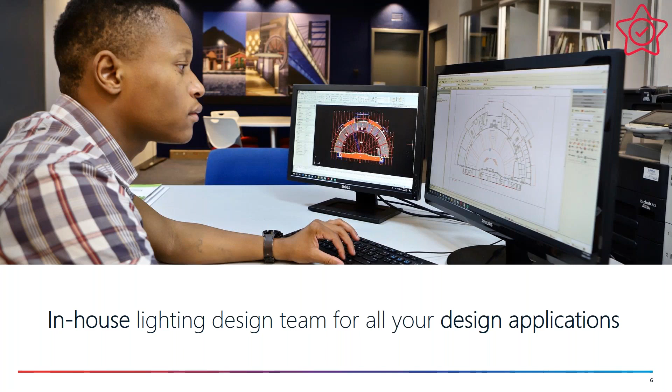Our in-house lighting design team has many years of collective design experience available to meet all your specific design needs. Our design team is proficient as well as flexible in providing solutions for virtually all aspects of lighting applications. Further aspects such as ROI calculations, that's return on investment, 3D modelings, etc., are all easily submitted by our team of lighting specialists.

As a design and manufacturing company, we offer lighting solutions for virtually all projects and product segments. Today's focus is on our BEKA glass reinforced polyester, or commonly known as a GRP pole, which are suitable for use in all the segments, be it ambiance, road and street lighting, various flood lighting applications, all the industrial and industry applications, and the various commercial segments.

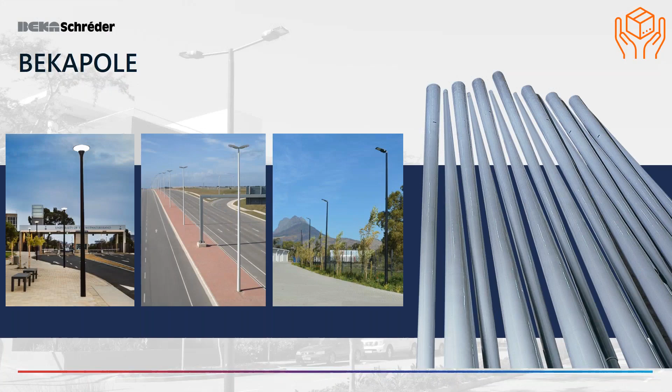So now let's consider the BEKA pole. As I mentioned briefly, our poles are perfectly suited for use in roads, in motorways, in urban and residential streets, interchanges, predominantly on the exit and entrance ramps, or in other words the on and off ramps, various urban areas such as squares or pedestrian zones, naturally bike and pedestrian paths, and various area lighting.

That could be such as various security requirements or large parking areas, harbors, be it the inner harbor roadways, access roads, or the multiple security requirements within the harbor, sports complexes, parking lots, access ways, perimeter lighting, security lighting, etc., and generally security lighting in various complexes and venues.

It could be perimeter lighting of prisons, police, army bases, air force bases, etc. as an example. Shopping centers, we could be utilizing our poles in parking areas, access roads, surrounding areas, security, plus many other applications, even railway zones as an example.

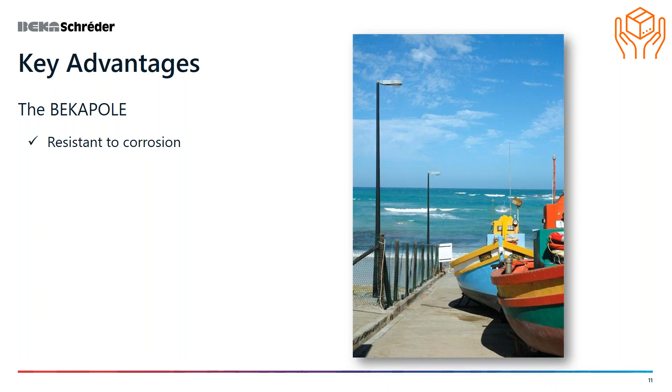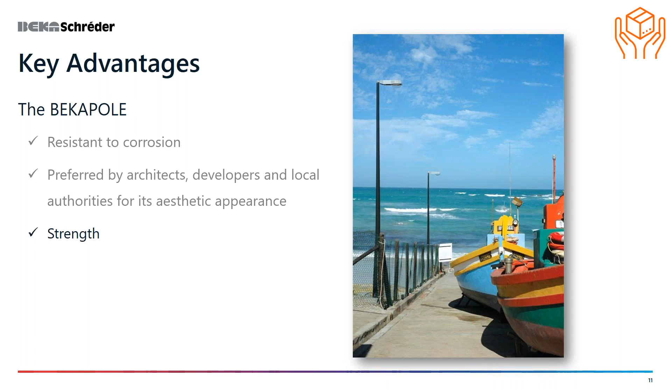Some key advantages of the BEKA fiberglass pole: it's used not only for resistance to corrosion, which is certainly a very high key advantage for the utilization of our GRP pole, but it's also preferred by architects, developers, local authorities for its very real aesthetic appearance with the continuously tapered pole, its intrinsic strength properties, the ease of installation, and the inherent safety for road users, which I'll discuss a little bit just now.

Another significant advantage is that our BEKA poles are completely maintenance-free. So there's no corrosion or decay, which ensures that the surface coat of the pole will not require maintenance, nor is there any internal deterioration.

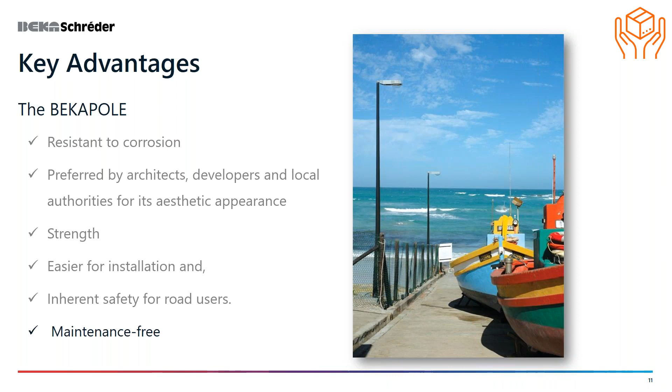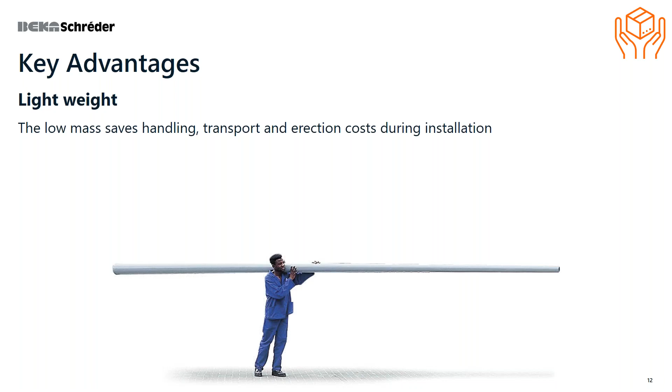Another advantage is the lightweight of our poles. The low mass saves handling, transport, and erection costs during installation. BEKA poles weigh roughly 25 to 40% compared to steel and 10% compared to a concrete pole. They can be transported by a light delivery vehicle instead of a heavy-duty truck, and carried and installed by as little as 1 to 2 people, depending on the length. Hence, installed BEKA poles are far more cost-effective than poles of heavier materials such as steel, concrete, or wood.

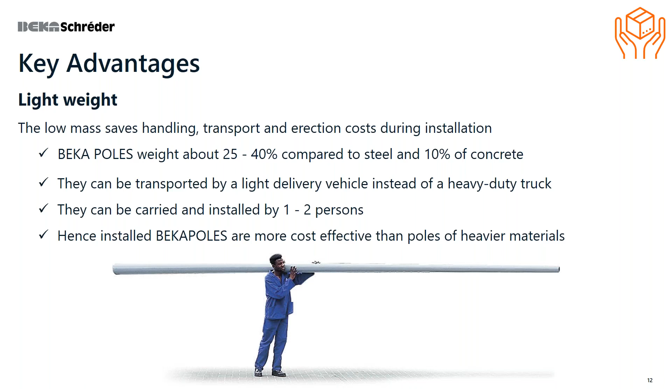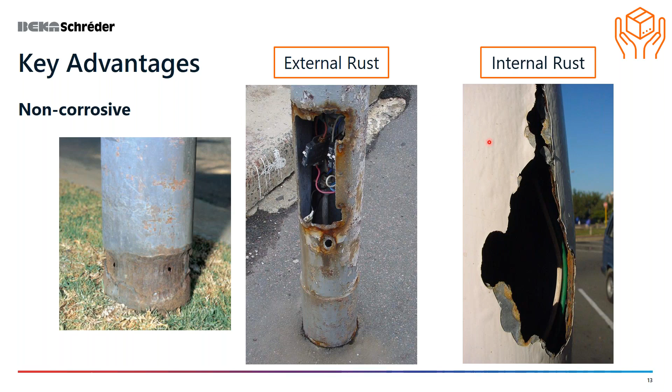One would immediately ask, how do you get internal corrosion, as shown here? But specifically for salt-laden air, as well as high acidic soil conditions, this builds up because vapor rises in the pole. By day the interior heats up, which draws vapor up the pole, and by night as the interior cools down, moisture drips back down through the pole, and slowly but surely you begin to get internal rust. You can see that surface there - that is actually internal. The external surface still appears perfect.

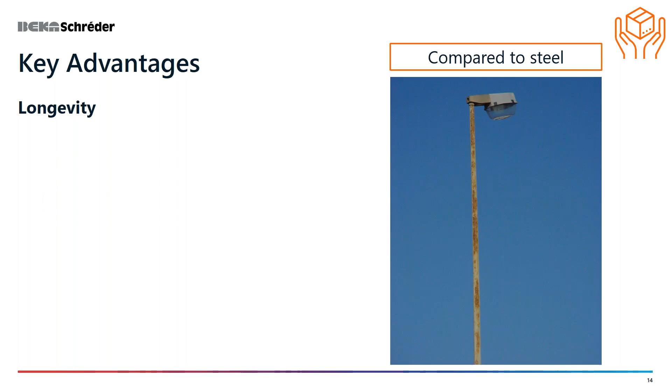The longevity of a fiberglass pole is incomparable to any other pole material. This example shown on the screen is steel. Over time, our poles will outlast wood, concrete, steel, and aluminium under any similar climatic conditions.

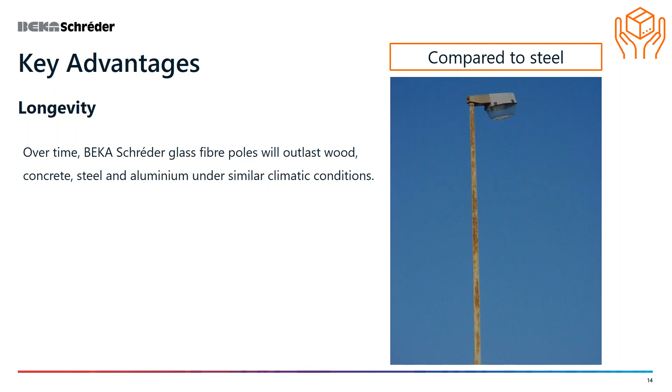BEKA poles actually have a virtually unlimited lifespan. The last time I had a discussion with one of the founding members of the company, way back in 1978, there were still references to poles installed in Namibia, an extremely highly corrosive environment, going back to 1978. That's in excess of 40 years, and the poles are still standing today.

They require no further surface treatment, such as painting. Yes, all materials will under UV begin to show apparent degradation, but our poles are easily treated simply by using a typical handy detergent and a bit of rubbing cloth, and it's amazing - your surface returns back to almost original appearance.

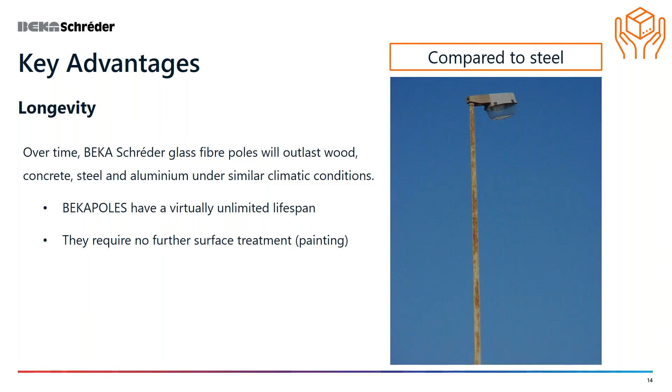Another key advantage is the versatility. We offer a wide range of spigots, floodlight mountings, base plates, and decorative arrangements, which ensures a product for almost every application that the architect or specifier might throw at us.

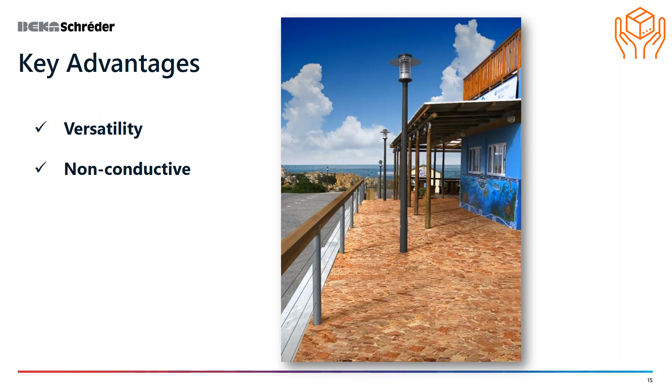Non-conductive, so this offers perfect electrical insulation, which prevents accidental electrocution by faulty wiring. Further to that, another use would be in electrical substations, utilized as a lightning arrestor. We have in years gone by developed a very specific lightning arrestor pole column in order to ensure your substation is electrically safe.

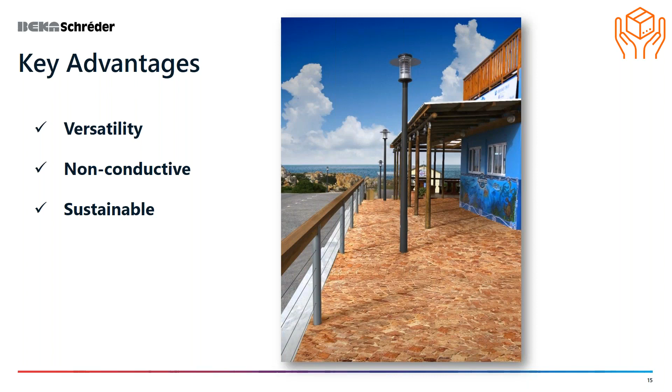And then the sustainability - the manufacturing process of glass fiber poles is much kinder to the environment than steel or timber products. Low inertia - there is a significant reduction in personal injury and or fatalities and damage to vehicles in road accidents where GRP poles are installed, compared to other pole structures such as steel, wood, or concrete.

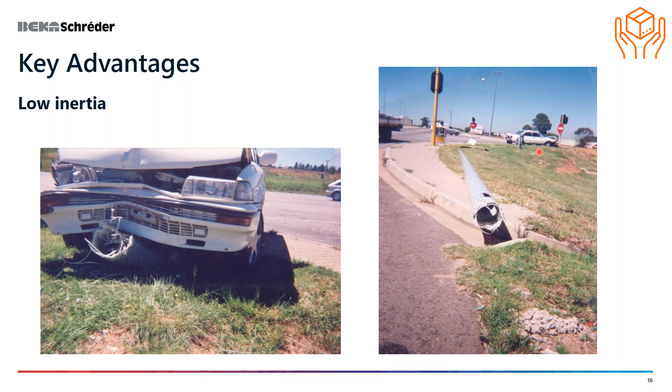As can be seen by these simple images, there's nominal damage to the vehicle, and when you look at the cab of the vehicle in the distance, you can see the cab is almost perfectly intact, meaning the driver and passengers are inherently safe.

Thus, BEKA poles provide increased safety to all road users, unlike potentially fatal steel, wood, or concrete poles. Forgive me, I intentionally did not take a photograph of an accident scene - I felt that would be gory and wanted to respect the viewer, but one can imagine potential damage, injuries or fatalities with a structure like the one on screen.

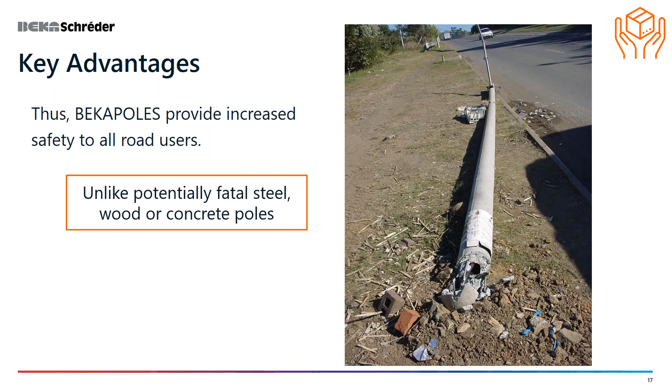Another key advantage is the high bending strength. As mentioned, per the SABS SANS 1749 standard, our poles are engineered to withstand a wind pressure of 500 pascals, inclusive of a 0.2 square meter luminaire area, with less than 5% deflection of the mounting height.

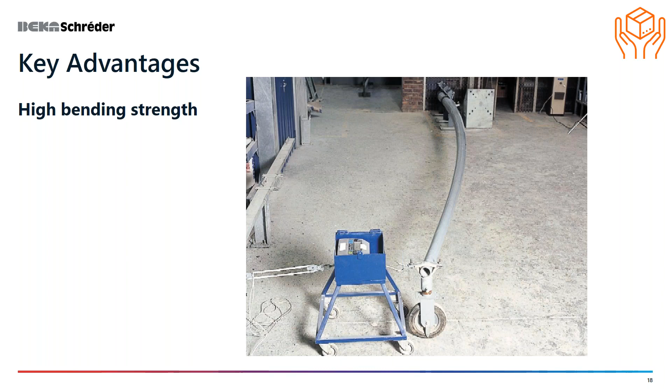Now, for any other wind speed conditions - we know certain coastal climates have significantly higher wind speeds than that - we are able to calculate and design poles for these specific categories.

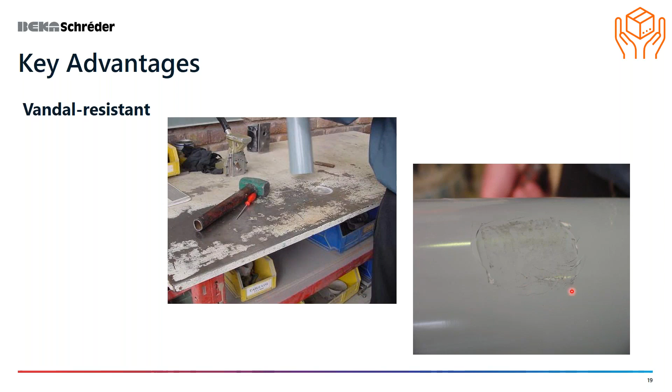Vandal resistance: the high impact strength of polyester gel coats and glass filament winding structures ensures a high degree of vandal resistance. It's very unlikely to damage the glass filament wound structure of the pole with a blunt or heavy instrument. A typical example is a 5-pound hammer smashing the pole - you'll see some nominal damage on the external surface, but that's fairly easily repaired with a pole repair kit that is supplied. Literally, if there's nominal damage like this, you are able to repair it on site.

Moving on to some myths, we often get discussions around potential myths of a fiberglass pole. Myth 1: fiberglass poles, GRP poles, whip around in the wind. Well, yes, they do naturally move, but I can assure you the reality is our poles offer a far higher degree of quality for street lights, specifically with our new generation electronics, in that the vibration amplitude is nowhere near as damaging and destructive as under a typical steel pole condition.

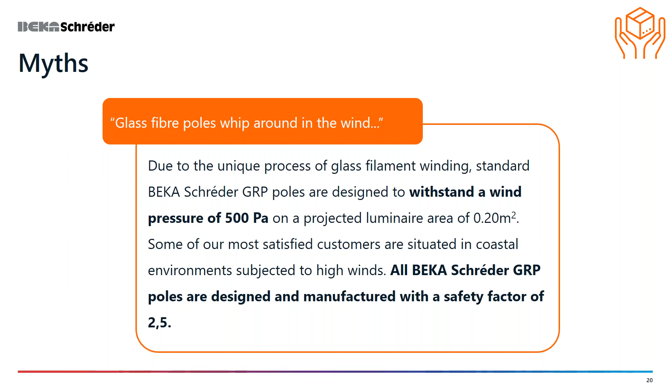Further to this, our poles are not only designed to the 500 Pascal standard, we also design with a safety factor of 2.5, ensuring that your BEKA pole structure will last in excess of 25 years.

Another myth is that glass fiber poles deteriorate by sunlight. This is not correct. Ultraviolet sunlight and rays will only deteriorate unprotected glass fiber. That's why this is eliminated by pigmenting the resin and applying the final polyester gel coat, which includes UV inhibitors on the surface of the pole structure. So at all times we have a perfect UV barrier on our pole.

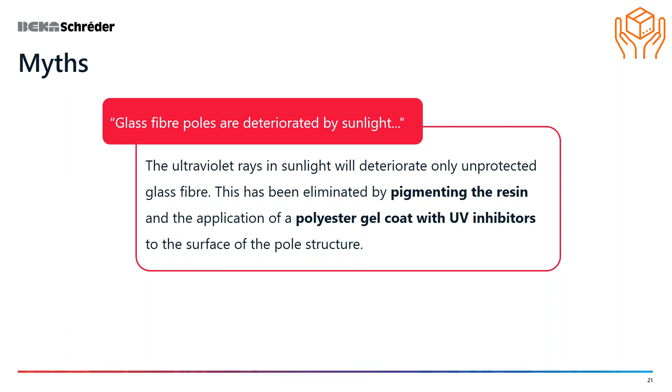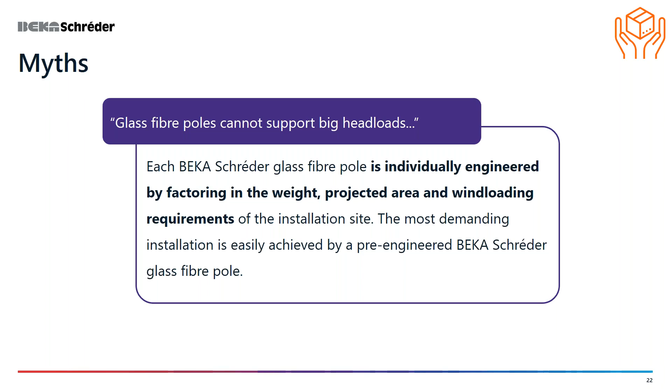The next myth: glass fiber poles cannot support big or large head loads. Each BEKA Schréder glass fiber pole is individually engineered by factoring in the weight, the projected wind area, and the wind loading requirements of that particular installation. We have references to very demanding wind load requirements where poles have been installed for many years, be it inland or in coastal conditions, with significantly higher wind projected areas than normal. We develop and design the pole structure to suit that particular installation.

Glass fiber poles are made out of plastic - this is incorrect. As I've mentioned, we manufacture our poles under a filament winding process, where continuous glass rovings are fed through a polyester resin bath and wound at an even tension on a rotating mandrel, resulting in a glass to resin mass ratio of about 70 to 30%, making full use of the tensile strength of the glass filament, which is more than that of steel.

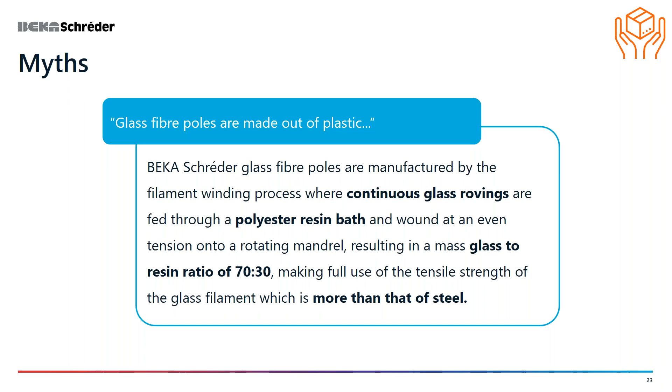Now, moving forward, we have a short video clip, just a brief 2-minute video showing the present day manufacturing process of our GRP poles.